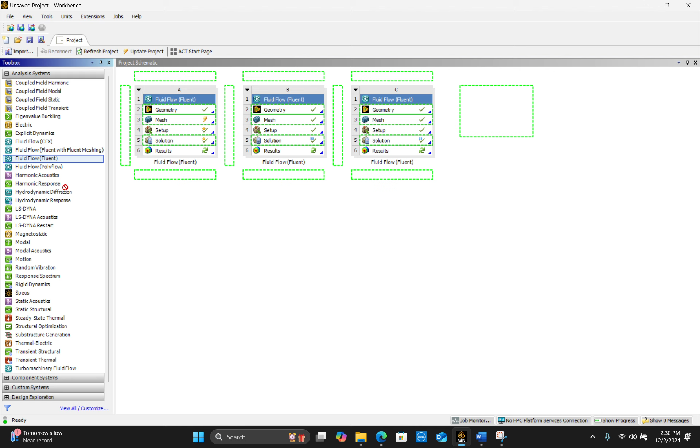Let's begin. So we are only going to use the fluid flow module in Fluent. You can just drag and drop this anywhere. These three are the ones that I just made before class, some sort of a practice for myself. It gives you all of the steps you need.

We can use the CAD software that are given, that are built into ANSYS, to build our geometry. Then we have to mesh it, set it up using the Fluent software, and do the analysis, right?

There are three different CAD software included in the ANSYS package. One is called Discovery, one is called SpaceClaim, and the oldest one is called the Design Modeler. I always use the Design Modeler because this is the software I have been using for the past 10 years, I think. But you are welcome to use the other two software, or SolidWorks and CATIA, whatever software you use for CAD modeling.

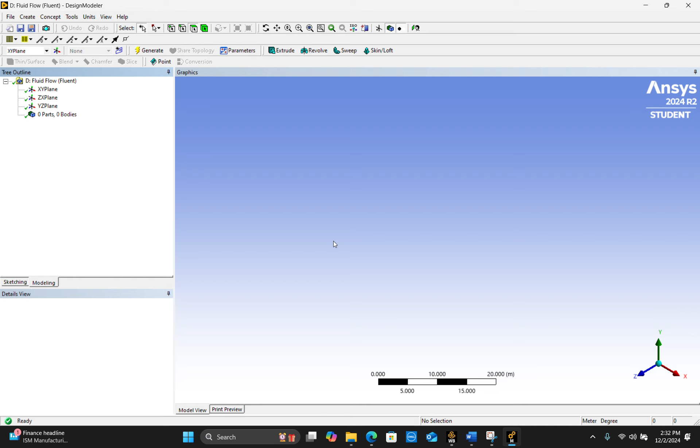It is better to use the built-in software, mainly because the geometry we are creating is very simple, just a couple of lines and a surface. Okay, so when you open the design modeler, this is what you're going to see. We are going to go to this sketching part right here to create a sketch of our ramjet, first of all.

I'm just going to create it using lines. And you have the scale here. Where is the mouse? Why don't I see the mouse?

You have the scale right here. This line in this geometry is 20 meters, which is an appropriate scale for ramjet modeling, but it is not an appropriate scale for resistojet. It's much smaller, so you want your scale for resistojet to be in like a 1 meter to 2 meter range. Okay.

Let me, for whatever reason... yeah. Let's make it a question.

Those of you who have been in lab 2, or on lab 2 right now, or on aerodynamics, what is my first step in building a geometry for fluid flow analysis? What should I build? Like when you're building a geometry for a stress analysis, just sketch the geometry. That's it. Do you have to do anything else?

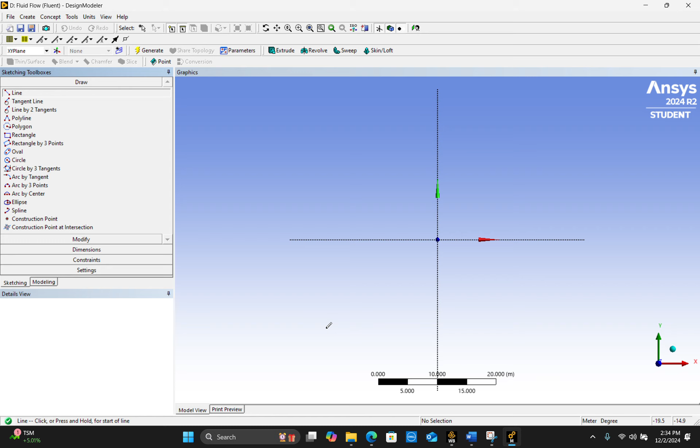So I'm going to create the 40 meter by 40 meter geometry, or around. I'm not really measuring these lines, I'm just drawing them. Whenever you see this P in DesignModeler, it means that you are on the point, so you are starting the line from a point.

This is what we want to do. We want to make a closed sketch, so later on we can turn it into a surface. Okay?

And whenever you see this H, it means that your line is a horizontal line. Does it have to be a horizontal line? Not really, not for the control volume, but it will be easier for the solver to deal with a horizontal boundary. And again, I want to be on the P, and so I have three sides of my control volume.

This line here will be my symmetry line, right? You can do a completely two-dimensional geometry as well, but if you can cut your geometry in half, you should, because you will reduce the computational expense by half, even halving the amount of resources you need to run a simulation.

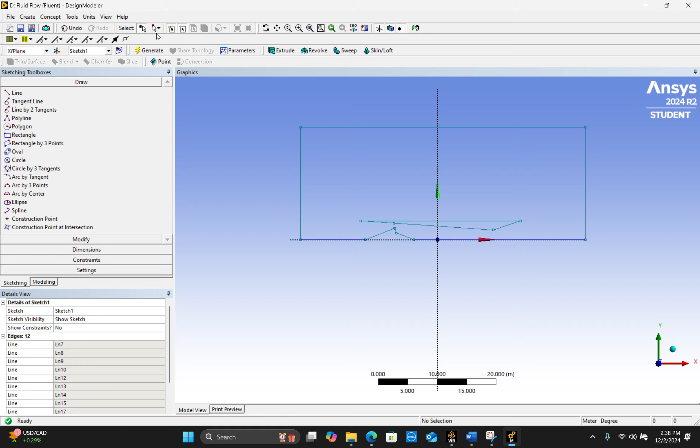So what you do next is, you don't really have to generate this, but you generate the sketch by pressing this generate button. You go back to the modeling, you go to concepts. We are planning to create a surface from sketches right here.

That's it. This is your geometry. There are a couple of things you definitely need to know about this geometry. You need to know where this inlet is and what the size of it is, because later on we have to create a line here and also at the exhaust.

Why do we need to measure the mass flow rate and velocity at the inlet and the exhaust? The mass flow rate just allows you to confirm that the model's working, because it should be equal.

Calculate the thrust. Your eventual goal here is to calculate the thrust and all of the other performance parameters that depend on thrust, right? And to calculate the thrust, you have to have an inlet mass flow rate and an exhaust mass flow rate, and the velocities.

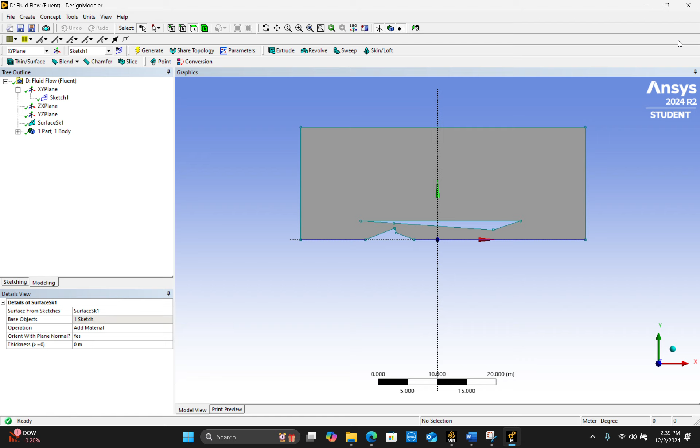So let's move on to the next parts. You can just close the software. You can see there's a check mark in front of my geometry, meaning that my geometry is complete.

The next step for us is to create a mesh. What is a mesh? Who can tell me what a mesh is? You just are essentially discretizing into finite domains. You can solve the continuity equations within individual squares. It's a bad explanation, but yeah.

Discretization is usually used for the equations, not the shape. So the assumption we make while using this method of analysis, specifically the finite volume method, not finite element method—it's a mathematical method, same working principle, just a little different mathematics.

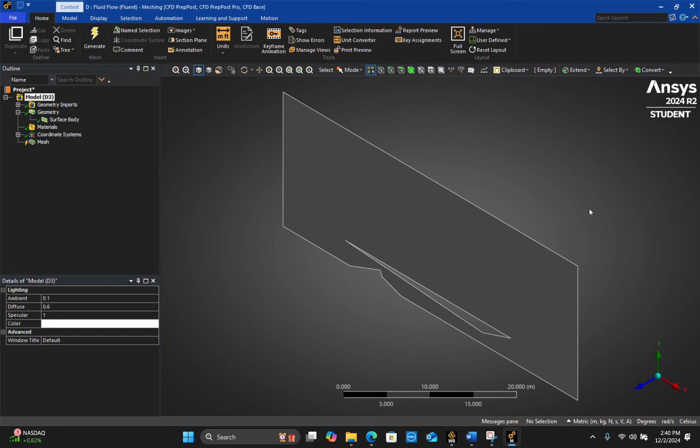The assumption is that the changes are linear, so we can discretize our huge partial differential equations and treat them as linear equations. The changes inside this geometry have to be linear, right? But we already know that the changes are not linear—we have a sharp face here, right? This is definitely not linear.

So what we do is we break down the geometry into smaller cells. The cells have to be small enough so that the assumption of linearity makes sense. Then these cells talk to each other, so the exit of a cell is the inlet of the next cell, and so on. This is what a mesh is.

You just break your geometry down to smaller elements, smaller cells. In finite element analysis, we call these elements. In finite volume, we call them cells.

Okay, so this is the meshing software. There are a couple of things we need to do here. We need to assign names to all of the boundaries of the geometry. What are the boundaries? These are the edges, right—these lines, and you see them everywhere. We also have to break this geometry into smaller cells, which is done through this module, mesh.

When you click on this, it gives you a couple of options. The first thing it asks you is what is the physics that you are trying to solve. If our physics is fluid physics, we are trying to do a computational fluid dynamics analysis, CFD, right?

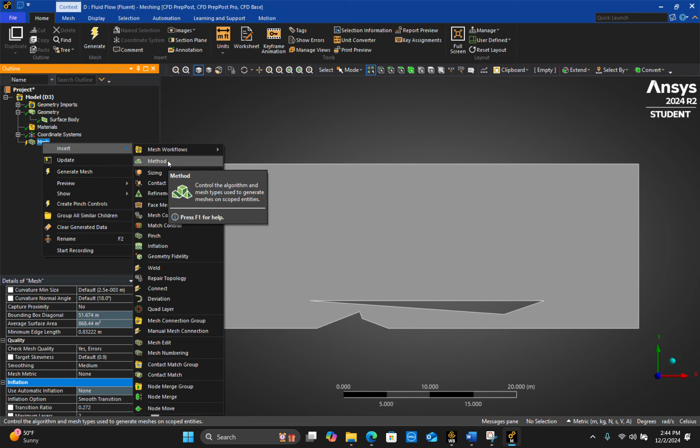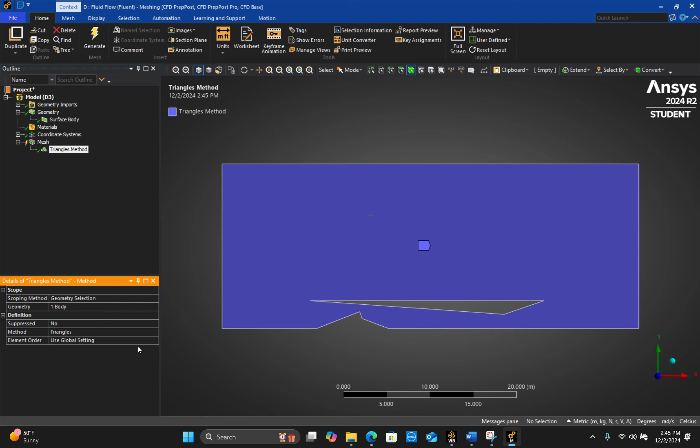For a geometry, I'm going to actually select this. For a geometry that is like this, which means it is not a very straightforward geometry, there are a lot of sharp edges. It is usually better to use a triangular mesh, meaning your cells are going to be triangles, not rectangles or squares. But again, there are a lot of other options.

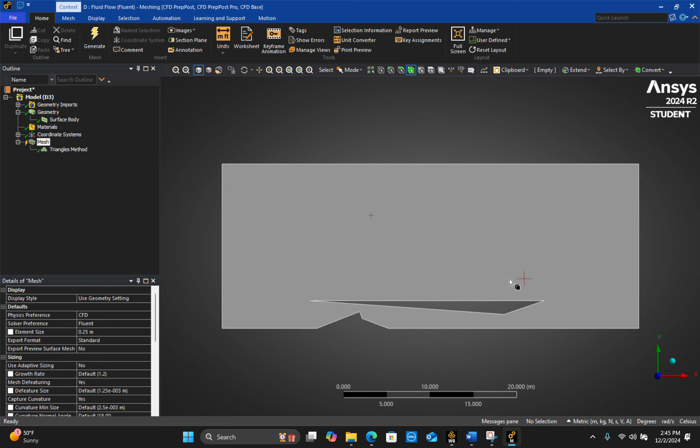You can actually do sizing, which will let you choose the number of points you are going to have at different parts of the mesh. That would be the most appropriate way of meshing this type of geometry, because most of the things happen here, right? The rest of the control volume, nothing really happens. We can have a bigger mesh here and a smaller mesh here.

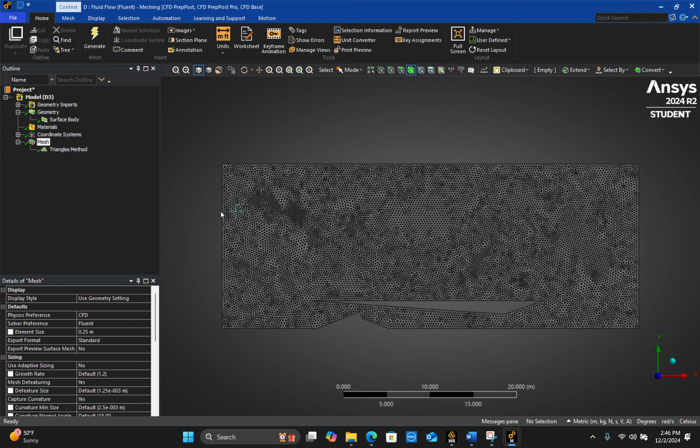But again, we want to keep it simple, so we'll just use a uniform mesh. And you can generate, it will create the mesh for you. You see, our geometry is divided into small, very small cells.

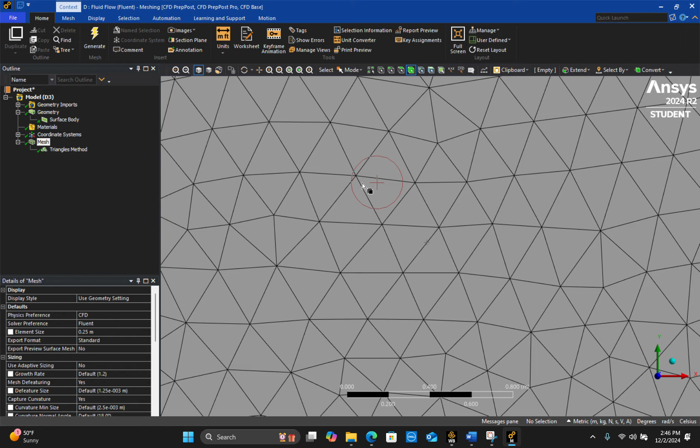So essentially, our equations are going to be applied to these small triangles, and we are going to solve our equations for each triangle. Then we're going to see how much the flux of each variable is out of the boundaries of a triangle, like how much is the momentum flux, how much is the mass flux, all of these things. And then we relate each triangle to each other to give you a final solution. Okay, meshing is done. Do you have any questions here?

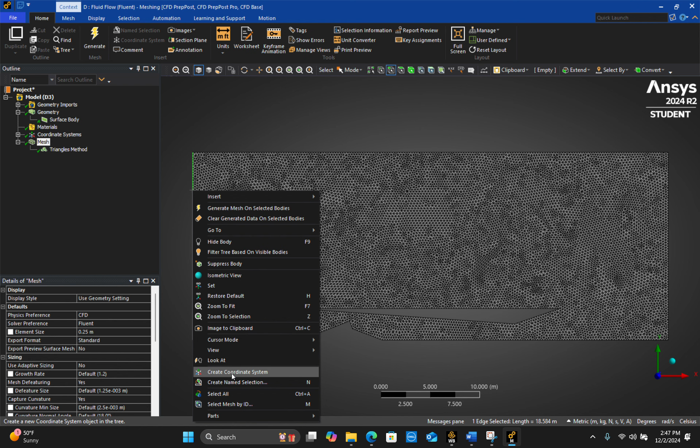No. Next step is to name all the boundaries. I want to change this selector to edge selector, because we are going to name the edges here. This one is called an inlet, because it is going to be an inlet. This will be the top outlet.

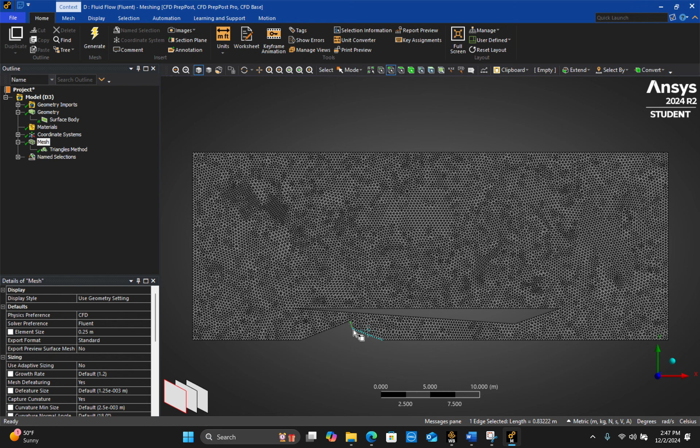This will be the back outlet. And this will be the symmetry line. These are all walls except for the fuel inlet. And this is the fuel inlet.

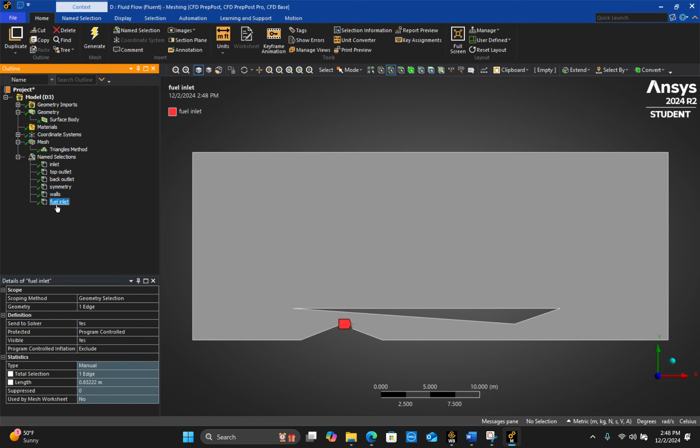A new menu appears here, and we have all of the selections right here. Do you have any questions? So everything's crystal clear up to this point. Sounds good.

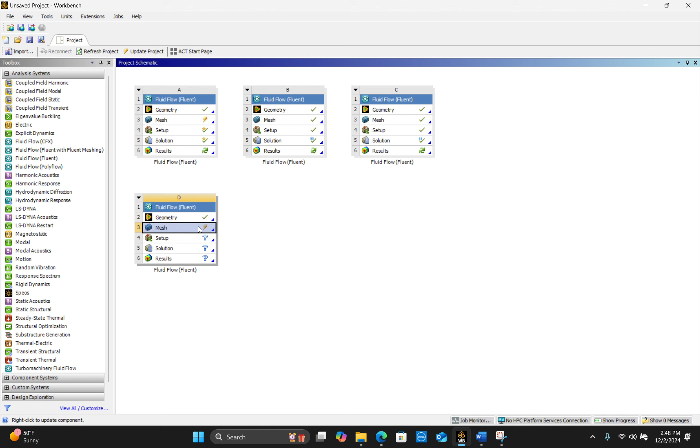You see this, this is a thunder sign, right? It means that your mesh is not updated. For whatever reason, the Fluent software and the meshing software in ANSYS don't really communicate with each other very well. So whenever you're done with meshing, you have to right click on this and hit update until you see the check mark. And then we can open the setup, which is your Fluent software.

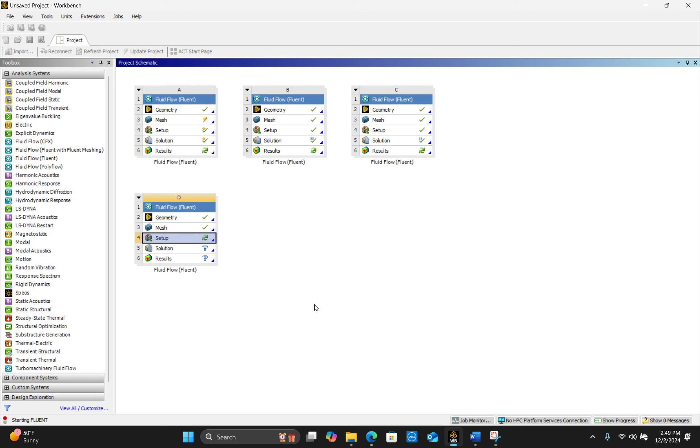But if you use the Fluent software that is installed on the lab computers, all of the computer labs have ANSYS installed—I'm talking about the computer labs upstairs. I've also asked IT to install ANSYS in the computers in the Aero lab, so they should also have ANSYS, but sometimes they have problems, I don't really know why. So on those computers, you don't have these limitations, not the cell limitations and also not the number of processors limitations. This is Fluent.

You will be working with this menu right here, but these two menus are essentially the same. The menu on top and the menu on the left are very similar, they give you the same options. The menu on top is a little more comprehensive.

Again, we are not using this, so let's go through each tab separately, and we'll stop whenever needed. When you double click on a tab, it will give you the options that are available. Double click on the general tab, it has different sections: mesh, solver, and gravity. In the mesh section, you have options that let you determine the quality of the mesh.

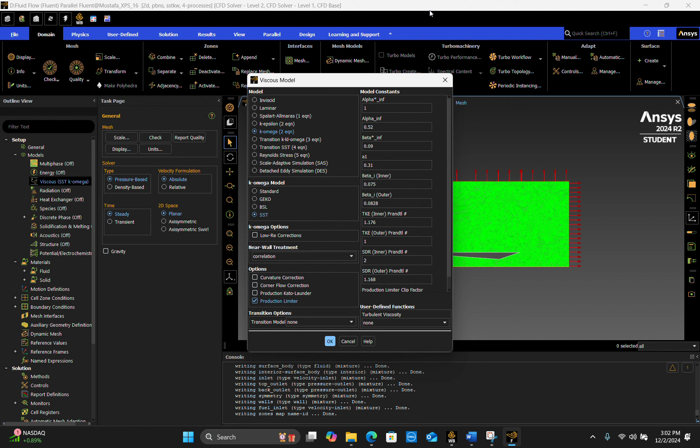Does this make sense? Okay, so do you need to know more than this about these models? No. Do you need to make an informed decision on which model to use? No, you can just go by the default one. If the default one doesn't work, just play with the models to see which one works better for you. Is it good to learn what these models are? Of course, but I don't think a lot of you will actually want to learn these models outside of this project. Okay, so I guess the three of you who jumped in will get the bonus point. Just send me an email, get 2 extra bonus points.

And then we can add radiation. We don't really have radiation here.

I guess a more appropriate version of our project needs to include radiation, solar radiation as well. But we don't have a heat exchanger, but we do have species transport. Where do we have a species transport?

Combustion, right? Combustion doesn't happen at the injector, but it happens because we are injecting fuel here. Right, there are different models.

We don't really need to use a combustion model. We can just use a regular species transport model. And then you want to make sure to tell the software that my reactions are happening not at the injector, not at any boundary, they're happening over the volume of the ramjet, so in the combustion chamber. So you have to make sure you check this volumetric here as well. And then here is where you assign your actual fuel.

I'm going to do air and hydrogen. This is asking me what your mixture is. If my fuel is hydrogen, my oxidizer is always air. So my mixture is air and hydrogen. You don't really need to, yes. So one time.

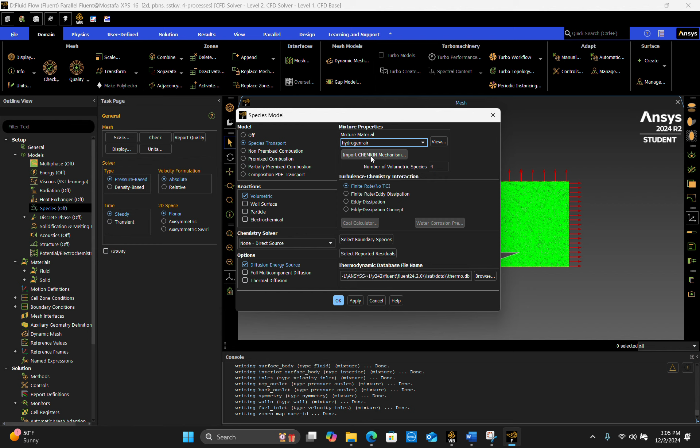Okay. I guess we didn't really. It did turn on the energy equation by default. And this is model. Do we have any questions about the models? Yes.

What is it? Yes, yes. You can change the type of turbulence chemistry interaction that you want to have. Here I've chosen a finite rate, meaning that there's no interaction between turbulence and combustion, so turbulence is not enhancing the combustion.

But since we have turbulence, we have to make sure we actually have a turbulence model here, which is eddy dissipation, to get the best results. Thank you for the question.

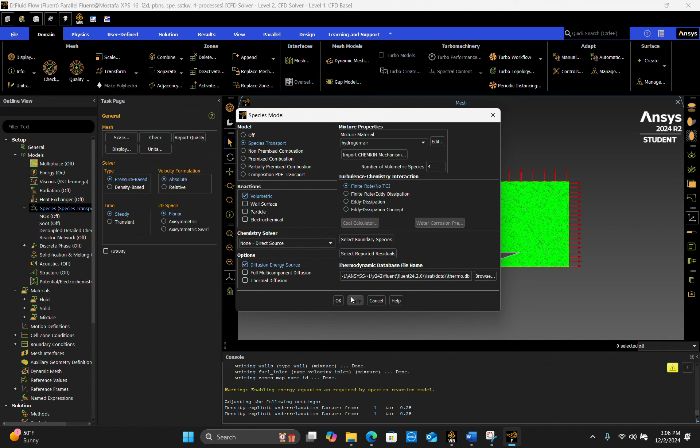Okay, next step is materials. So if you double click on the materials, it will give you all of the materials here. We have the mixture. Let's actually click on the mixture.

You can check the reaction, right here. It says reaction right here. You can click on edit. It will show you we are only solving one reaction. Is this true for combustion that is happening? Do we only have one reaction?

See what the reaction is. It says H2 is my hydrogen. The stoichiometric coefficient is 1. O2, stoichiometric coefficient is half. And then the product is going to be 1 H2O, 1 water, right? That is my reaction. Do we have any more reactions in a real world scenario?

Yes, the answer is yes. We actually have many more reactions, right? But for the purposes of this project, we are going to keep it to this one because it is not a combustion course, right? I don't think Dr. Wan gives any projects for the combustion course, actually.

So, yes. So out of curiosity, does ANSYS just assume... It can do chemical kinetics, yeah. No, it has a different, you can actually, there are a lot of options. You can actually import chemistry from CHEMKIN as well. Have you worked with CHEMKIN?

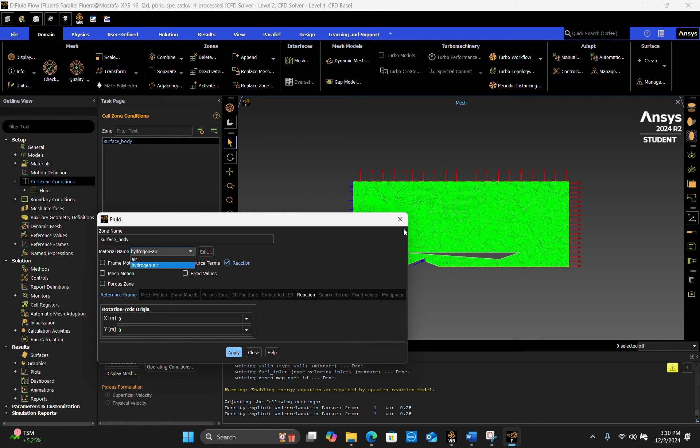This menu, the other one, is cell zone conditions. This essentially tells us what type of material we have in our control volume, which is a fluid, air specifically, which is the material we want to have. I guess it says it's just using the mixture, but we can choose air or mixture. Most of them should be fine, because the amount of fuel we have in the system is negligible in general.

Next one is the boundary conditions. When you double click on the boundary condition, this menu opens. So you actually have to go through all of your geometries, all of your boundaries, all of the edges, and assign a condition to them. You have to tell the software, this is an inlet, this is an outlet, this is a wall, right? And you have to specify a velocity for your inlet. You have to tell the software that this is my flight velocity, the flight velocity at which I want to calculate thrust, right? Essentially you're calculating thrust, you need to maintain this flight velocity that you are assigning. Does this make sense?

Okay, so the back outlet, this one, is said to be a pressure outlet, which is one of the types of outlets. Do we need to know what all of these types of boundaries are? It is not a bad idea for you to actually at least go through them and see what the options are, but you don't really need to know what all of them are.

We are not going to use a pressure outlet. Why? Because when you have two outlets that are perpendicular to each other, you will get a lot of errors at this point where they actually meet, right? So we are going to use another type of inlet to represent our outlet. What is the difference between an inlet and an outlet? Think about it. What is the main difference between an inlet and an outlet?

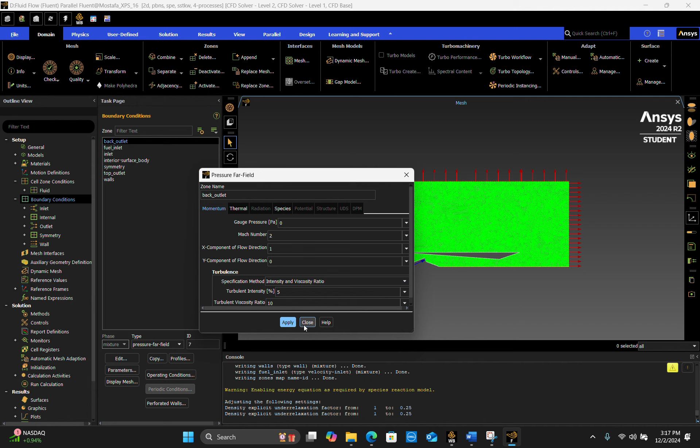Let's do the same thing for the other outlet on the top.

What should we do with the species? Set anything for the species here. What is it? No, so the boundaries you are assigning - this is where the solution starts based on your assignment to the boundaries. If you assign it to Mach number of 2, the solution will start from the boundary at Mach number 2, and then it will solve the rest of the geometry.

The answer is yes, we have to change this, but it doesn't have to be accurate. It doesn't have to be an exact number. So what do you think we have, like in the species? This is for the reaction kinetics. We have H2 hydrogen, O2 oxygen, and H2O water. Which one of these are going to pass through the outlets?

Far field is going to be unaffected. Like far field effectively, that's the definition of far field, right? It will effectively be only air. Which means that out of these three, we will only have oxygen.

How much oxygen? How much of the flow is going to be oxygen? 21%, right? So the mass fraction here should be 0.21. Do we care that these do not add up to 1? No, because the rest of it is nitrogen that does not play a role in our reaction, so we don't really care about it.

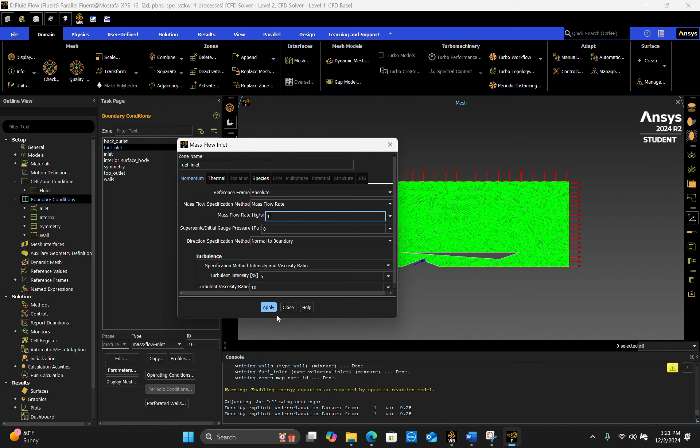Again, the numbers you use cannot be just random numbers. You can refer to an example problem in the book, which again might be a random number, but that is an informed random number, close to reality.

For the inlet right here, we can do a velocity inlet. We could still do a pressure far field, since that was an inlet that we're using as an outlet. Or we can do a mass flow inlet. We don't want to do mass flow inlet because you don't really know how much mass is flowing into the control volume. We might only have control over the mass flow to the ramjet, and that's what we care about. We don't really care how much mass is coming into the whole control volume—most of it is going out untouched. So let's stick to velocity inlet here, and figure out what the velocity and direction should be.

Mach 2. But we don't have Mach number here, we have velocity. So what is the Mach 2 velocity? All of our other parameters are at sea level—atmospheric conditions, density, all the reference values for this solution are at sea level, which means we can calculate the velocity at the inlet for sea level as well. So what is the speed of sound at sea level? It's 330 meters per second. So what is Mach 2? 660 meters per second.

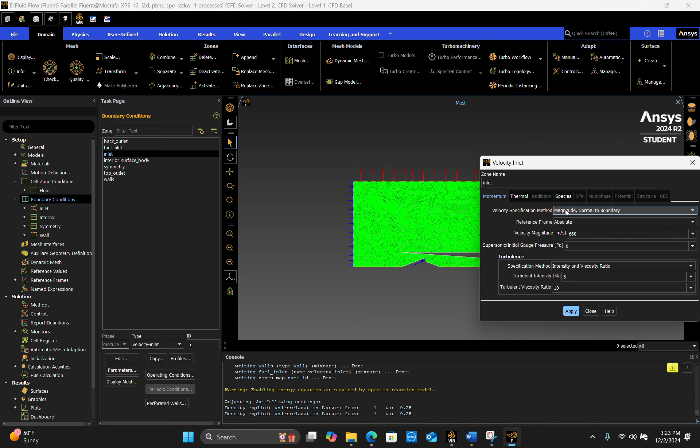For the direction of the velocity, right now in the options we have magnitude, so we have to assign the magnitude, which is 660 meters per second, and it has to be normal to the boundary, which is the correct direction. Or you can change this to magnitude and direction. In case you want a different direction for the inlet—for example, if you're doing an aerodynamic analysis and changing the angle of attack, you have to change the direction of the inlet, not the direction of the actual airfoil you're analyzing. We can use this: x component of the flow is 1, meaning it's moving in this direction.

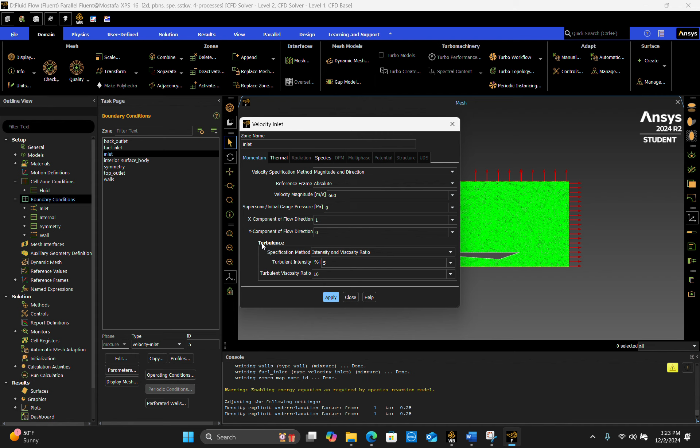Apply and done. For the interior surface, that's just the interior of your control volume—we don't need to do anything about it. The symmetry, since we named it correctly, Fluent was able to assign the correct boundary condition to it, so we don't need to change anything here. We already played with the top outlet, and the wall is also considered a wall. The only thing you can actually change for the wall is its temperature. We don't have any heater here, so we don't need to change anything. But in case of a resistojet, we'll have walls that act as heaters.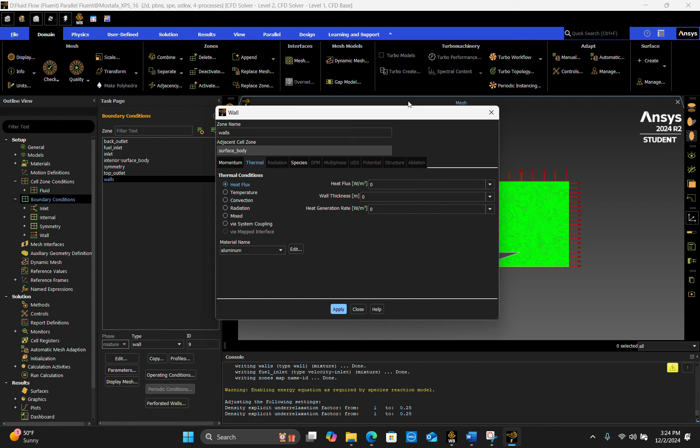Then we get to solutions. These methods are the discretization methods Matthew mentioned. So what are discretization methods? We essentially take a very complicated partial differential equation and break it down into a simpler linear equation for the finite volume. Those of you in finite element method, I'm sure you've talked about this. You haven't talked about this? Okay.

Again, if you take a CFD course, I'm sure they'll talk about it, but we don't really need to worry about it here. For density calculation, it's second order—meaning the order of accuracy is second order, so you're accurate up to 1/100th of your unit. Like if density is one, you're accurate up to 1/100th of kilograms per cubic meter for density calculations. We can increase this to third order, but the problem is it will stiffen your solver, meaning it will be harder for your solver to actually reach a solution. There's a compromise—second order should work fine for your project, so you don't need to change anything here.

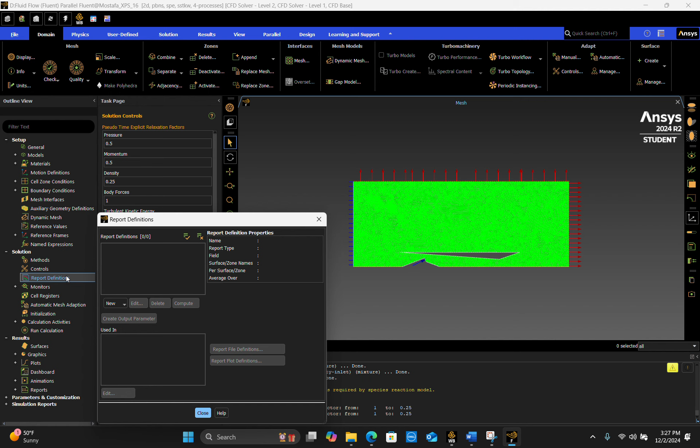We want to get the mass flow rate and average velocity at the inlet and the outlet. So we have to create a report definition. The new report definition, and these are surface reports. So let's see flow rates right here.

It is asking you where do you want me as a solver to calculate the flow rate. It's asking you which surface do you want to look at. But none of the surfaces we have already defined are our surface of interest, which essentially means that we have to create a new line, right?

It's asking us the dimensions of this line. Where's the starting point, where's the end point? That's why I told you in the beginning when we were building this geometry that you have to know where your inlet is. You have to actually know the exact location of the inlet so you can create these lines. I'm just going to create a random line, and it was created as line 7.

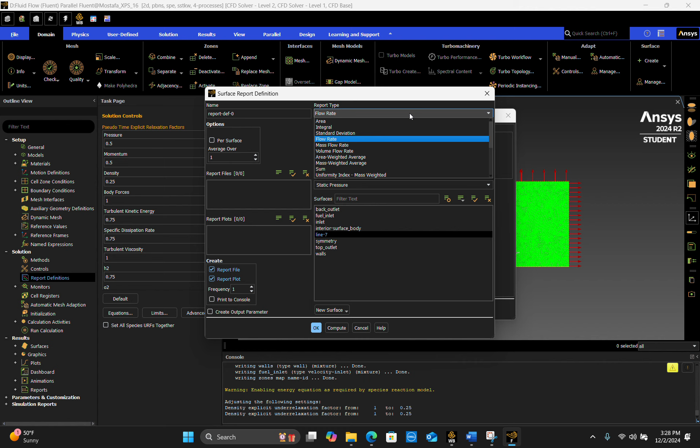So I'm reporting the flow rate. We can actually have mass flow rates. Here we can have another option for velocity. I don't really remember where it was. Volume, average velocity, area weighted.

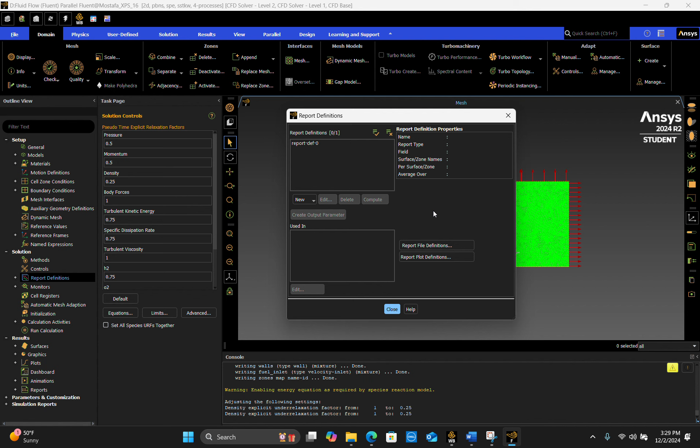It is somewhere in these menus. I will look for it and find it. So as we are solving the problem, it will give us, for the final solution, the mass flow rate at a random location. I assigned a random location, but you have to get the mass flow rate at the inlet and the outlet, and also the average velocity, the area weighted average velocity.

Do you have any questions so far? How confused are you? Not confused at all. So we have 2 people who are not confused at all. Half of you are already checked out. Those of you who are not checked out, yes. On the inlet right here. Yeah.

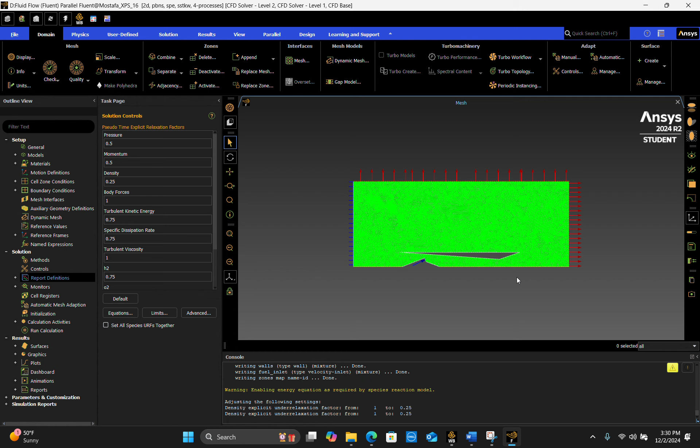That's right. And you have to actually multiply it by 2 because it's a symmetrical thing, right? And then in the monitors, yes. Because you're calculating the mass flow that is going to the top side of your ramjet, right? But it's a symmetry. So the symmetry is the rest of the ramjet that is right here at the bottom, right? But we are not solving for it. So whatever mass flow you have here, you have to multiply by 2 to account for all of it going into there. Okay.

So in the monitors, you can actually add new windows. You can monitor the velocity. You can monitor the forces. We can monitor whatever you want to monitor. But one thing we all are going to monitor is the residual. What is the residual? Yes.

What does it have to do with there? It's the difference between the solution and the two iterations. Exactly. So for all of these computational models, they start from an initial guess, right? And then solve the whole thing again using that initial guess. Compare the final solution to the initial guess. And use the final solution as the initial guess for the second iteration and the third iteration. So the difference between the initial guess and the final solution is called the residual, right?

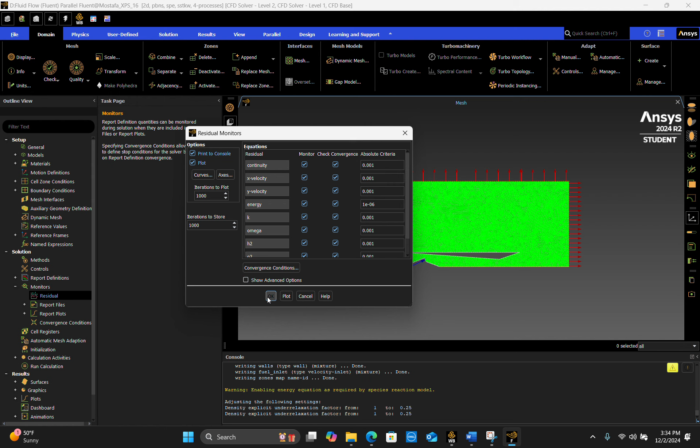Okay, what time is it? I think we have to stop here. We didn't even get to solve one case, but we were close. We are just a minute away from this, so let's just finish this.

So when you're done with all of the residuals and everything else, you don't really need to make any changes. But the one thing you have to do is initialization, meaning you have to tell your software what your initial guess is. You have two options for initialization: a standard one where you assign the initial guesses yourself, or you ask the solver to do the job for you.

We're going to ask the solver - hybrid initialization, click initialize. It just gave us a warning that we didn't really reach convergence of 1 to the negative 6. That doesn't really matter, right? We have the convergence values - it's 8 to the negative 6, which is lower than all of our residuals for a solution. Remember the residuals were 0.001, and 8 to the negative 6 is better than 0.001. So we can accept this initialization.

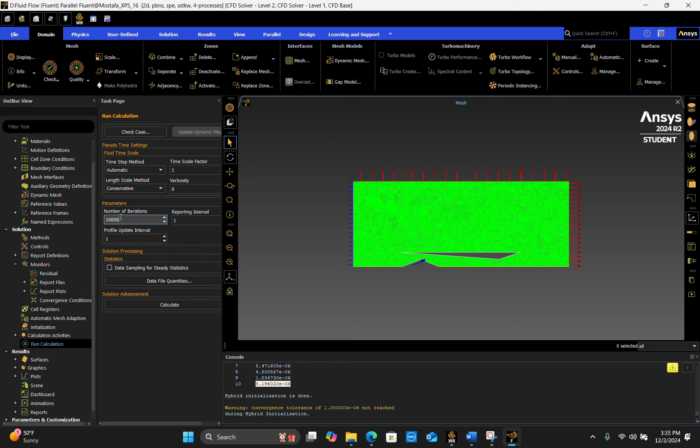Then you go to run this calculation. We don't care about the pseudo time step setting. The only part we care about is this number of iterations - it has to be larger than 0. I'm going to set it to 10,000 and then hit calculate.

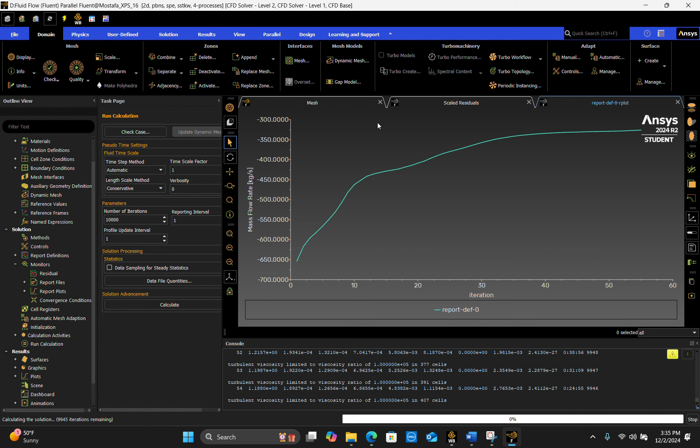See, it is reporting the report definition to me. This is the mass flow rate at that random point, but I can also go to the residuals. Each line is colored - the continuity residual is this one, it usually reaches convergence at a slower pace compared to others. You can see the continuity is at 10 to the negative 1.1, the difference between the final solution of an iteration and the initial guess of an iteration. Not the best solution, but it is going down little by little.

This is mass conservation. We have x velocity, the white line, and y velocity residual. We don't really have any movement in the y direction, that's why the y residual is very low. It's only in that direction - you're going to get there.

So you want the lines to go down, and you want them to go down as smoothly as possible. If you see a lot of fluctuations, you have done something wrong. I think in the tutorial I posted, we actually get a lot of fluctuations, but we never get to a final solution. But it seems like we are getting there. It depends, it can be all of them, it can be anything.

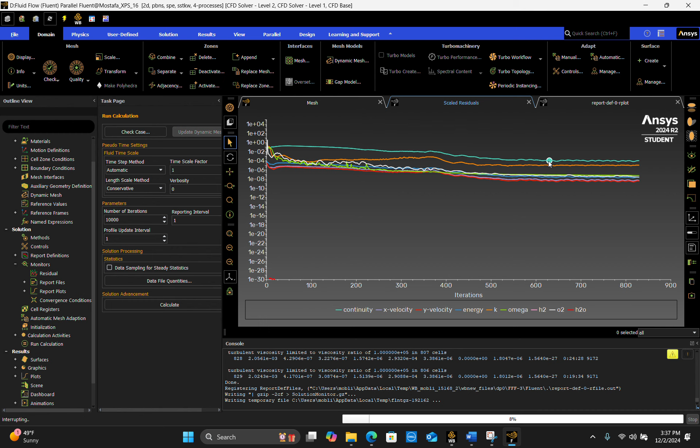Okay, it is going down little by little. We are out of time, so I'm just going to stop this. When you have not reached the convergence criteria you have set, that doesn't mean you don't have any solutions, but these are solutions that do not meet your expectations of accuracy. Does it make sense? Right now we should see some sort of a solution.

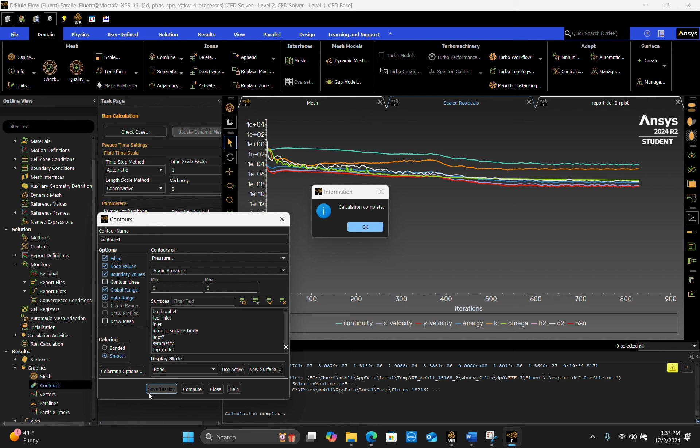So if you could never get to convergence, you can report these types of solutions and mention that we have reached a solution with a residual of 0.1. This is not what I wanted, but this is what I have. Does that make sense? So let's stop here, we're gonna come back on.